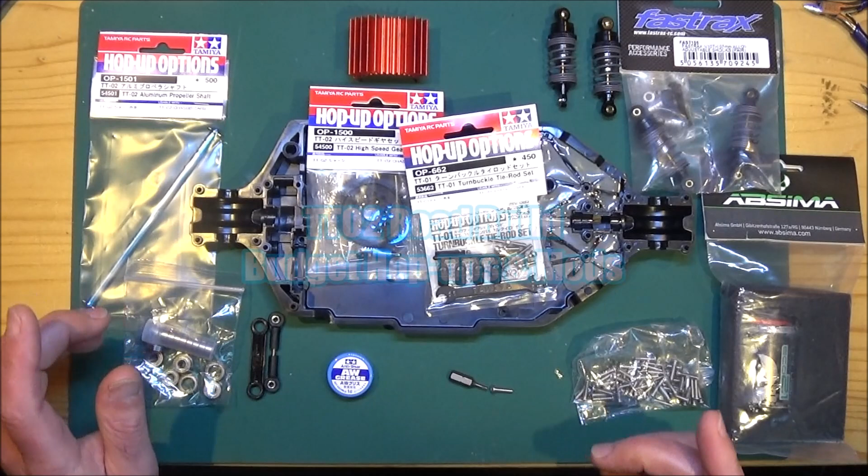Today I'm going to start building my TT02 chassis. This is for my wonderful Ford GT Mk2 body. This is how far I've got with that - the body all done. I've got a video coming up of how I did that, but before that I need to get the chassis completed. So obviously this is going to be running on the road, and I thought I'd share with you the little mods and changes I'm going to make to try and hopefully make it perform a little bit better than the stock setup.

So the main thing with these mods, apart from the shocks which are a little more expensive, is these are all really cheap, and some of them don't cost anything - I think all less than about 10 UK pounds. The shocks were over 20, but I think that's pretty much the price you're going to have to pay to get some kind of oil-filled shocks, but we'll talk about those later.

So these are the bits I've got. What I'll do is go through the build and focus on each of the little mods I'm doing, and explain what the mod is and what I think the benefits are. So if you're following along, you could mix and match, choose which of these mods might suit your build, and hopefully at least one will be of some use or interest to you. So let's crack on with it.

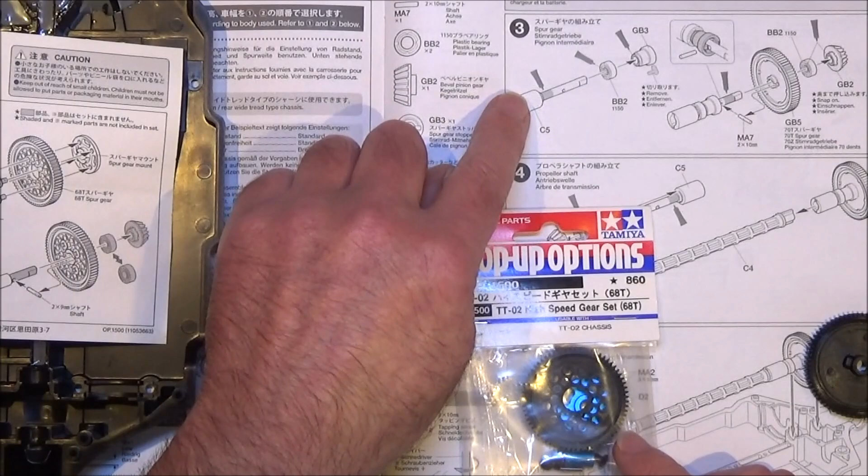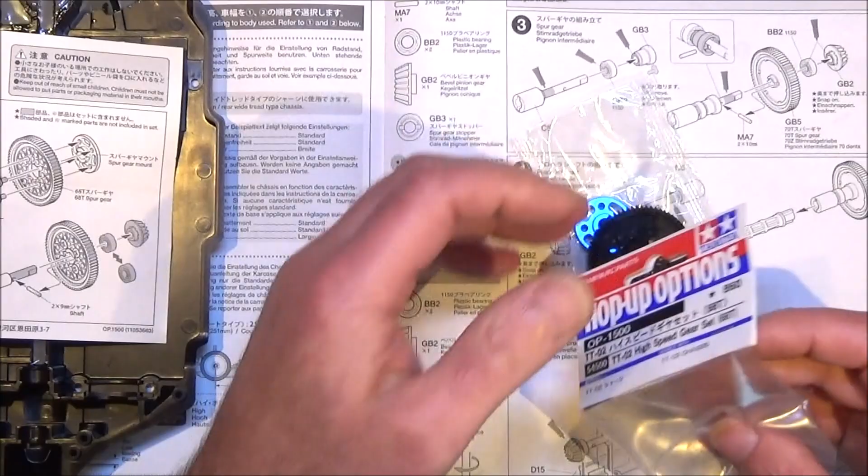Okay, so starting at step 3, the first mod I'm going to make is to swap out the spur gear. It shows here fitting the standard 70T spur. So I've got this hop up option, the high speed gear set with a 68T spur gear. The reason I'm going to use this is because it's going to give me higher gear ratios and a little bit more top speed. So that's going to go in as follows.

The first thing we need to do is fit this alloy carrier onto the spur with the 4 screws provided.

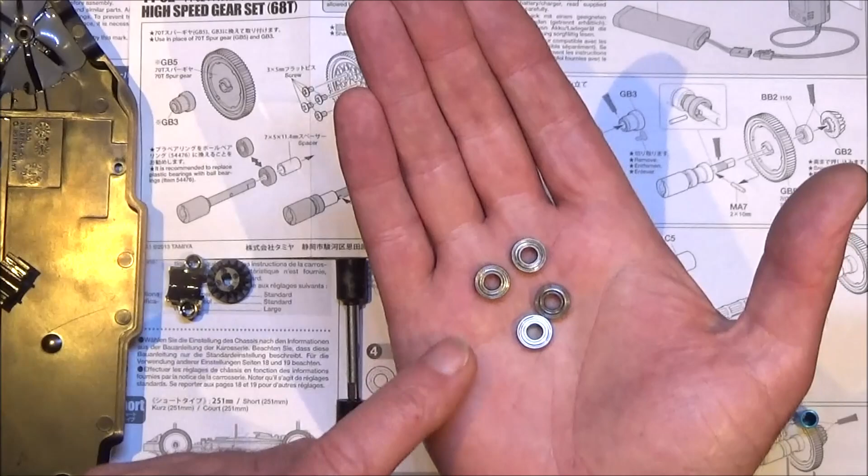Straight on to the next mod, which is recommended in the instructions for the high speed gear set, is to swap out the plastic bushings for a set of metal bearings. I do recommend you get the whole set for the kit so you can totally replace all of these. There are several reasons, the main one being you will never get as smooth a running with the bushings as you will with the bearings. They create more friction, they wear out pretty quickly, and the more they wear, the more vibration and resistance you're going to get. So you'll be smoother and faster with a set of metal bearings, plus they'll last a lot longer.

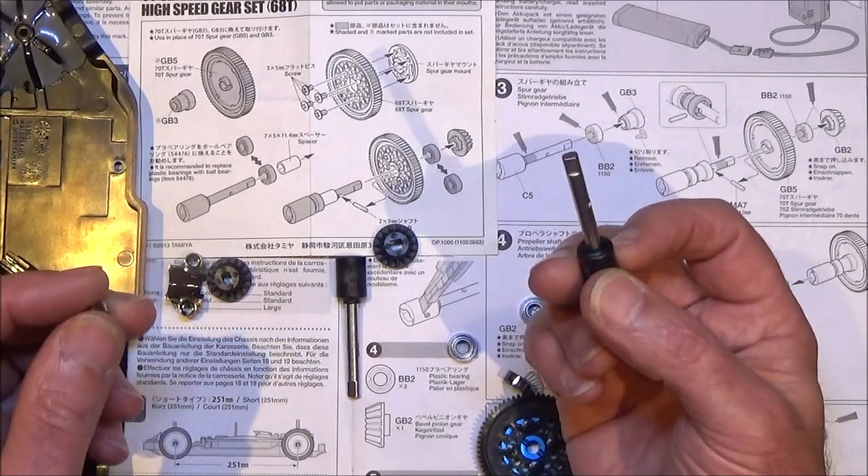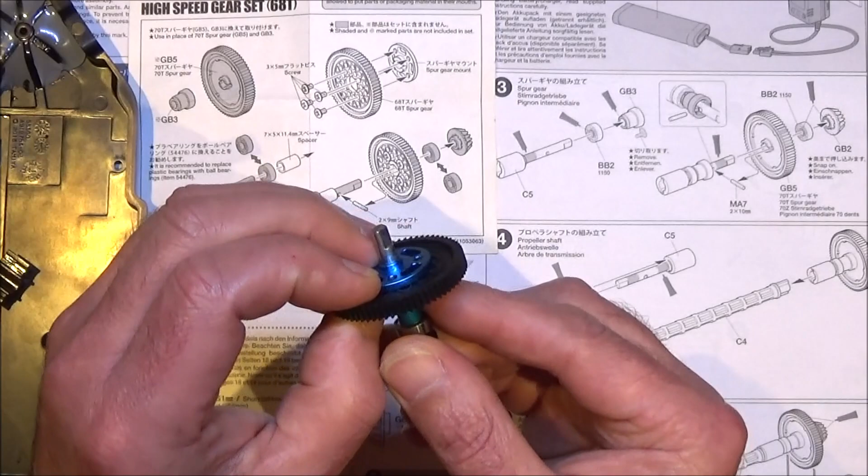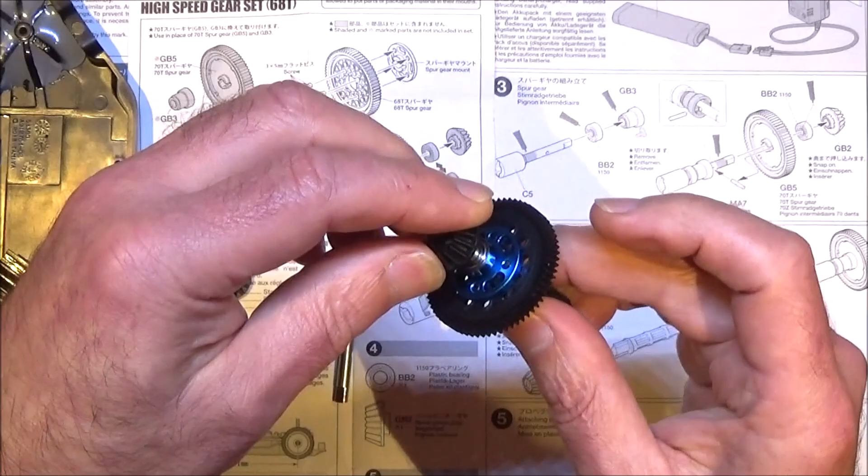So to fit the high speed gear, what we need to do is get your shaft here, which is C5, put on the first 1150 bearing, then your aluminium spacer. You've got your small pin or shaft which goes through that hole. Simply take your spur gear, and fit that shaft or pin into the groove in the carrier. Then your second 1150 bearing, and your GB2 bevel gear goes on the end. So that's the one end done.

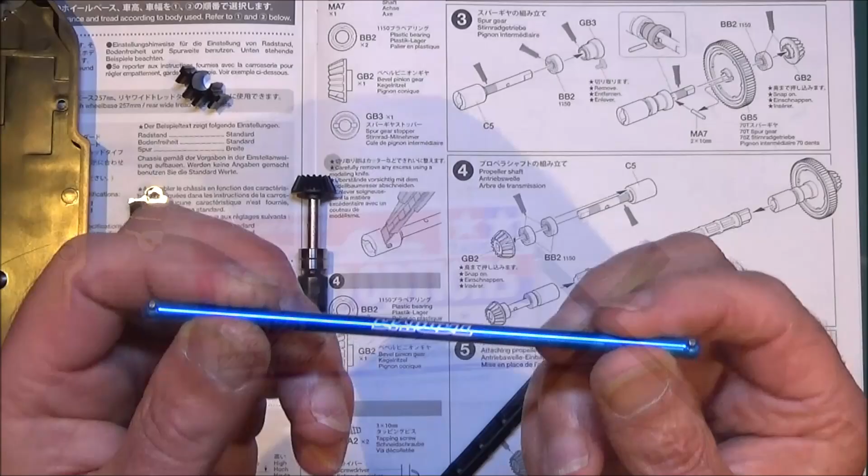Straight into step 4 of my next recommended mod, which is this hop up TT02 aluminium propeller shaft. You can see the numbers, and that's this little beauty here. This is going to replace the plastic prop shaft, and the reason for this is it's bigger, bulkier, has more rotating mass. It's flexible and will actually twist under load. So straight away replacing it with one of these will give you basically a smoother running TT02.

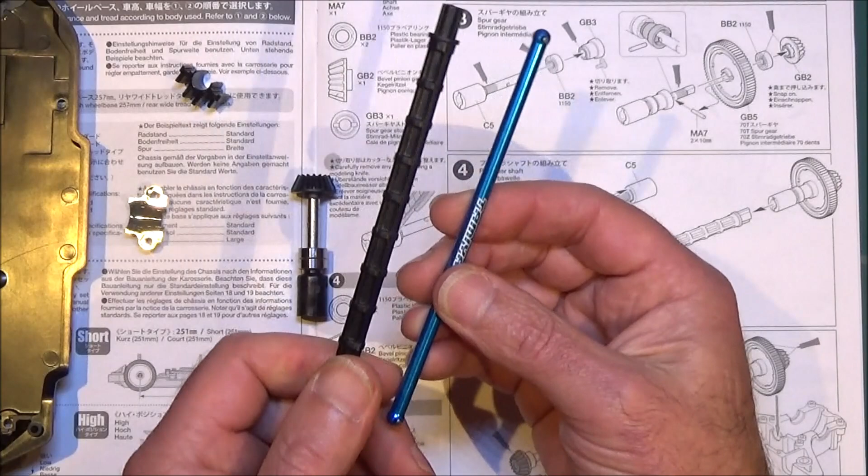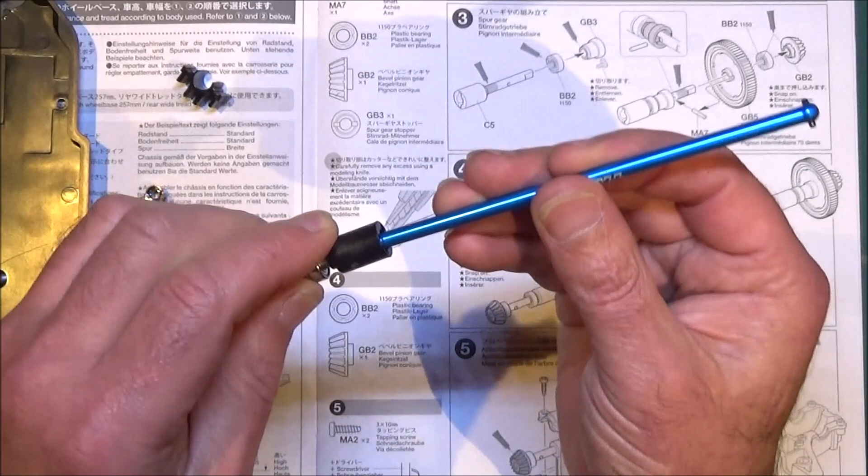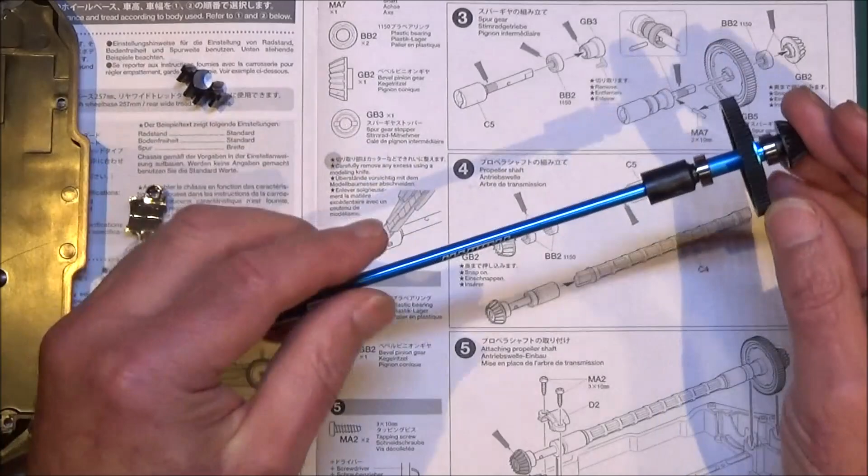You can replace these C5 parts with aluminium cups that go with this, but to save money, you can see that these do fit perfectly. I think you might get a little bit of an advantage with the aluminium ones, a bit tougher maybe, but these work okay in my experience. So yes, save a few quid - we're going to go with the original ones. So put your 1150 bearings on and your other bevel gear, and pop each end on like so, and straight to step 5, which is going to be putting it in the chassis.

Just drop it in place, make sure the bearings go into the bearing carriers in the chassis like so. It should spin round nice and freely.

Notice I didn't put in this part D15, and the reason for that is it doesn't really do much, except when it's in place, the parts that stick out either side restrict the movement of your steering mechanism and quite drastically reduce the amount of steering lock you get. So that's another little tip that costs you nothing: if you want a bit more steering, leave that part out.

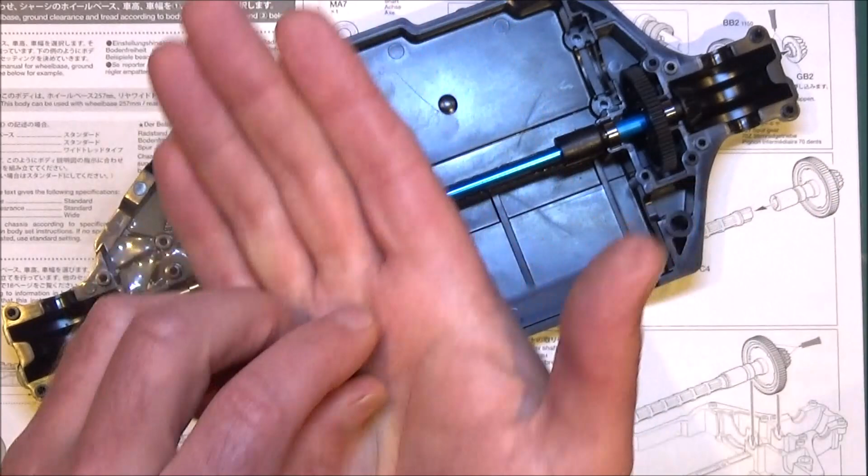I'm just going to clamp the front down with this part D2, which it says to fix into place with the self-tapping 10mm screws. Straight into one of my other little tips: replace those with stainless steel hex head cap screws.

Now these are machine screws, not self-tappers, but they work perfectly into the plastics. I've tried them many times before in other kits, no problems at all. The reason for using these is, again, dirt cheap - enough screws to finish the whole kit cost me about £1 or £2 last time. You use a hex wrench, and the mechanical fit into the head is much better than a crosshead screw, so when you're doing maintenance or rebuilds in future, you've got less chance of slipping with the driver. Also, they're stainless, so they won't rust, and stainless is a lot harder and tougher than the mild steel screws that come with the kit. Definitely worth putting those in because they're so cheap.

So we'll just get this fitted.

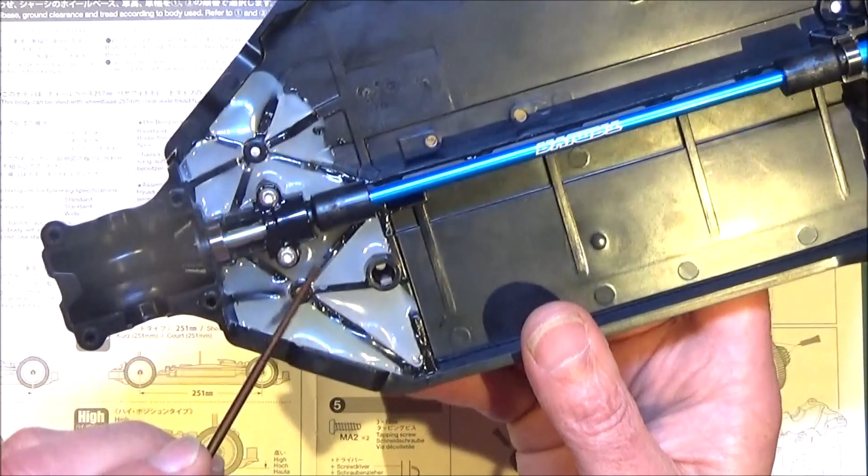Okay, that's done. And finally, another tip while we're at it - you might be thinking, what is that mess all around that webbing at the front? That's a bit of hot glue I've filled the gaps in this webbing with. The reason for this is many times I've had bits of dirt and debris, little sticks and so on flick up from the drive wheels and get caught down those gaps, jamming up the actual steering mechanism when that's in place, and this stops that from happening. You don't have to use hot glue - you can use putty, foam, anything that basically stops things getting caught around this area, which is where the steering mechanism will go eventually. So that's another little tip.

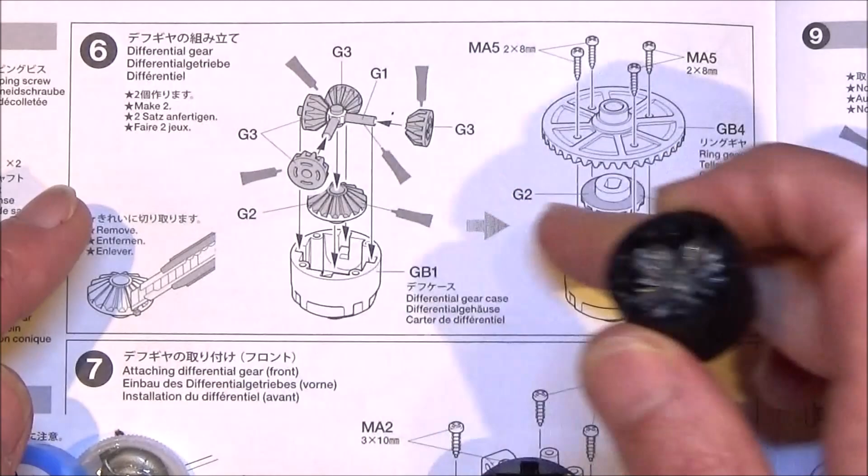Step 6 is making up the differential gears. There are two of them to do, and the only difference I've done here compared to the manual is using Tamiya AW grease instead of the grease provided - this will stiffen up the diff quite well. This stuff is really good, it's really sticky. If you can't get this, use any kind of really thick grease you can get. I always use a brush to apply it because it gets everywhere and doesn't come off - it's kind of like glue really. So just apply that sparingly.

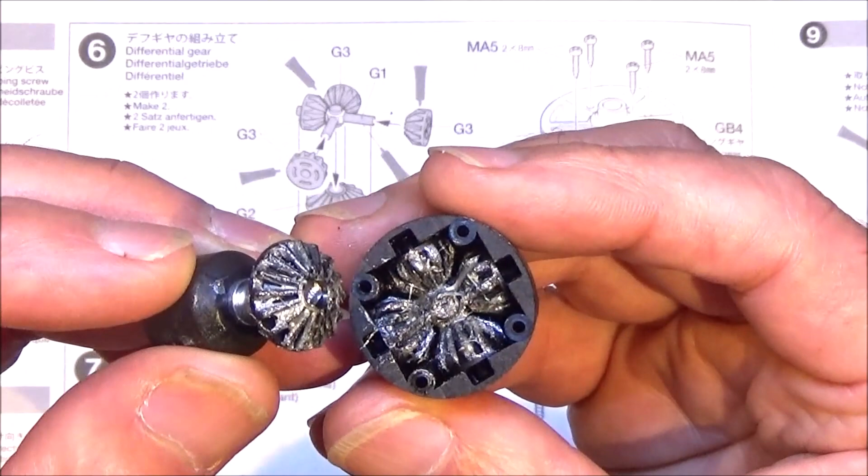Just finish off by putting the top bevel gear in. Again, I'm holding that with the output cup so I don't get grease all over my fingers. And when you turn it, you can really feel and hear how tight that is now compared to how it would normally be.

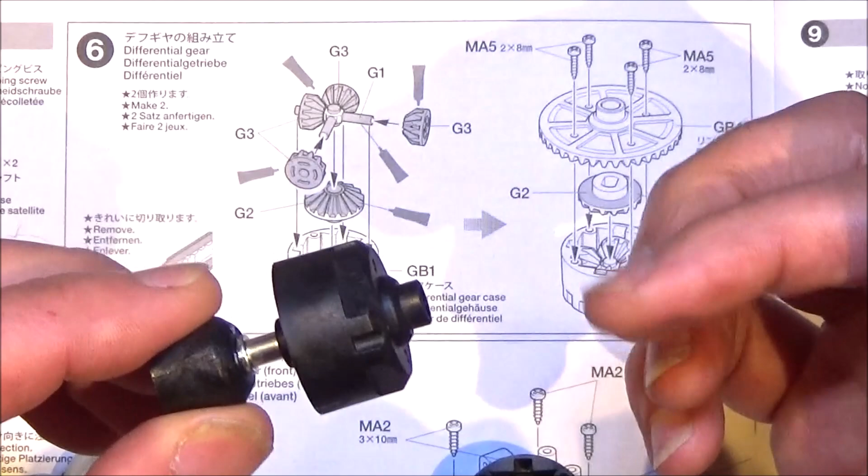So why are we doing this? The main function of a differential is to allow one wheel to turn faster than another. This is so that when we're going around a corner, the wheel on the outside needs to travel faster than the wheel on the inside, and that's what the differential allows. Now the downside is it also allows one wheel to spin freely - so if one wheel loses traction and starts to spin, all of the power will be sent from the differential to that one wheel that's spinning.

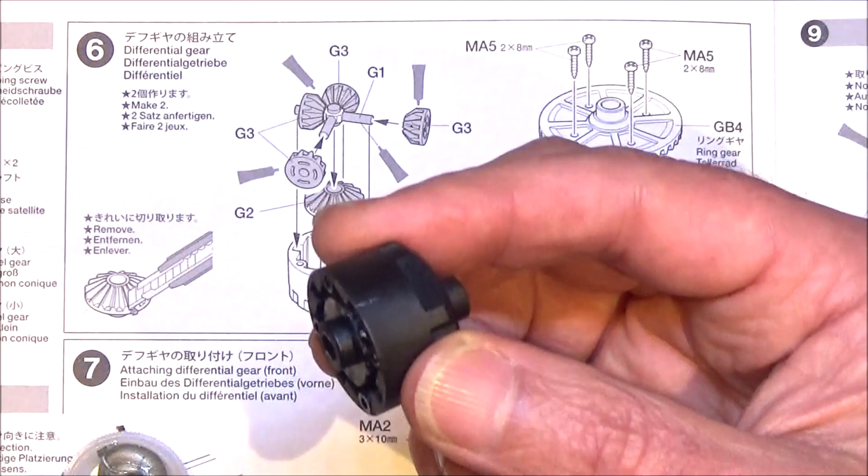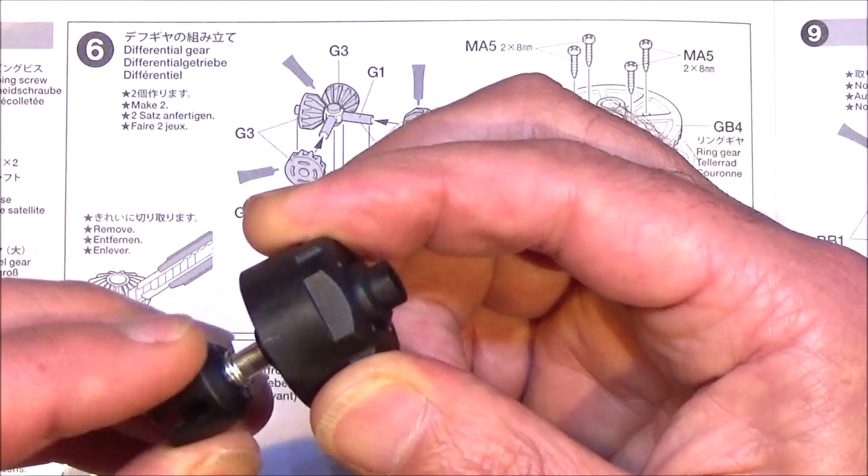Obviously this reduces traction, you're not getting traction to the other wheel that is touching the floor, which reduces speed and your car won't go as fast. So if we put this grease in, the AW grease, it tightens up and allows some of the power, when one wheel is spinning, to go to the other wheel. That's what we call a limited slip differential.

So that's both the diffs built up, and I've just popped them into place. I've put the bearings on, just drop the one in the front and the one in the rear. Make sure you get them the right way around. You can see this one points one way, the ring gear's there, and it's on the opposite side at the back. If you turn the shaft, you should get both diffs turning in the same direction.

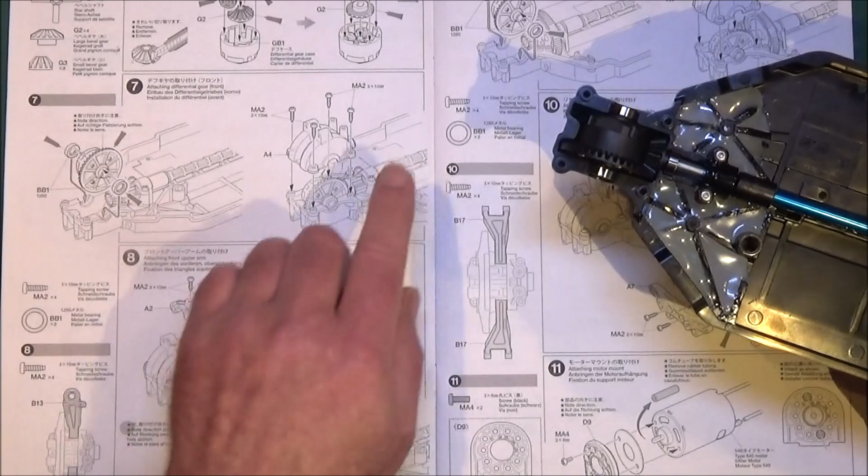Okay, so I'm just going to follow the rest of the manual through now, which is fitting the top arms, I think, and the damper stays, and I'll come back at step 11, which is going to be my next upgrade or mod, which is the motor.

On this build I'm trying to get the most performance for the least amount of money, so I've gone for this one because the Sport Tune motor is about £25 in the UK, and this one, would you believe, is £9, including postage. Another reason for going for this one is that it spins at a rated 25,000 RPM. Compare that to the Tamiya Sport Tuned, which I think is about 18,500. This thing spins a lot faster and therefore should give a lot more top speed. Well, that's the idea anyway, and it's a real good budget motor.

I've used them before, and I've also used them on the Tamiya TT-02 ESC. I know it's not rated for a 21 turn, but I haven't had any problems. Also, they've managed to pull the same gearing as the stock motor, so I'll be fitting the stock 22 tooth pinion on this one.

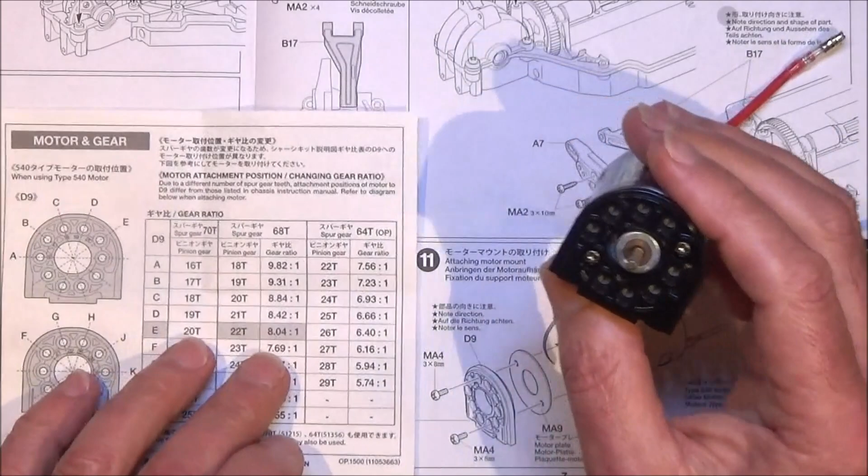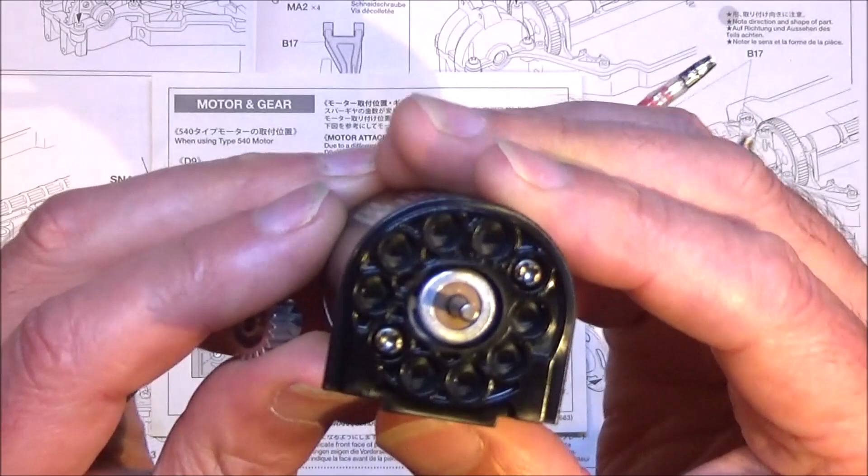Because I've got the high-speed gear set, we need to refer to this chart here, which shows that for the 22 tooth pinion I need to put it in the 20 tooth pinion position, which is position E, as you can see. So that's what I've done — attached it there to the 20 tooth markings. I'm just going to loosely fit the pinion and then set it in the right position once it's in the chassis, which I'm going to do next.

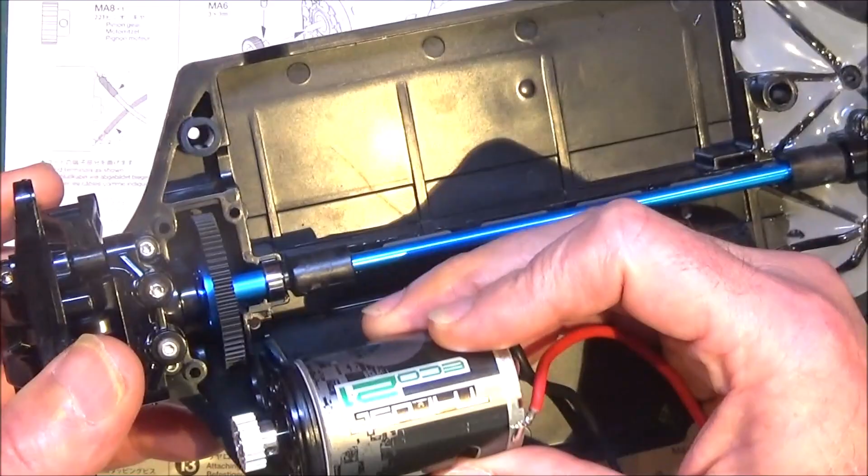Okay, so it just slots in there, and what you want to do is get that pinion right in the centre of the spur gear, as you can see, and then we can nip up that Allen screw.

So all I need to do is get the screws into this and then get the cover in place, and I'll get on with the next few steps off camera until we get to the next upgrade, which I'm going to do to the steering links.

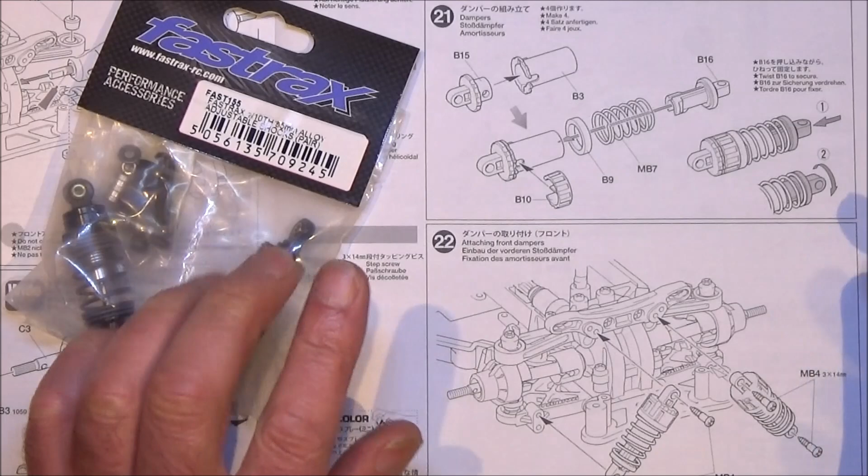Okay then, as the fitting of the dampers comes before the steering in the manual, I'll do that upgrade first. So yeah, obviously this is the standard shock. It calls it a damper, and as you know, dampers are supposed to slow the movement of the shock absorber due to the spring. As you can see with the standard one, I've just put this together to show you — look at the movement in that. It's a very sloppy fit, and there's no damping whatsoever. It's just, as I call it, a pogo stick. So those are going to make your TT02 bounce all over the place. The solution to that is to fit some oil shocks.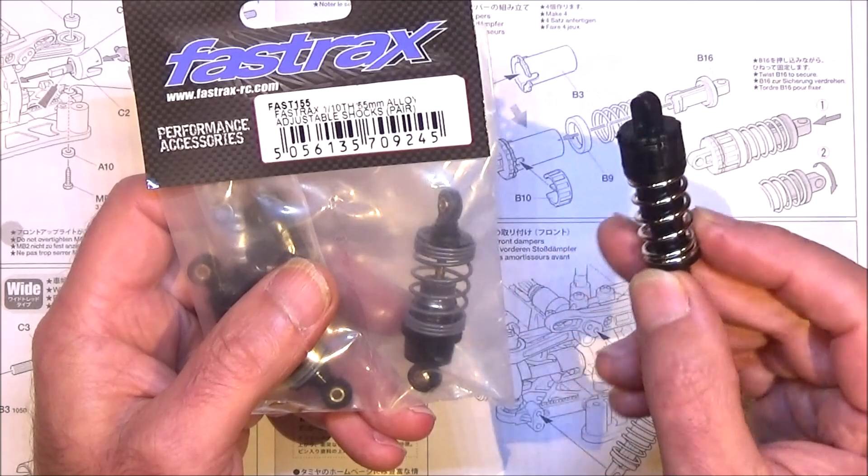Now I think that any oil shocks whatsoever are going to be better than these standard shock absorbers, as they're called. And I ordered these Fastrax ones. You can see the number there, and they seem to tick all the boxes. Just get them out the packet,

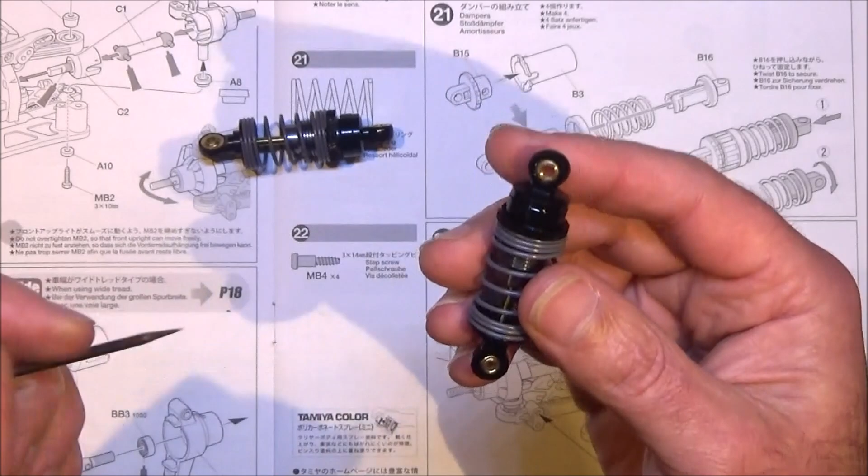and the shocks themselves are really well specified. As you can see, at each end we've got like a brass ball joint which allows the shock to move in all directions, which is good. It's got a knurled adjuster there, and we can adjust the preload kind of infinitely really just by turning that up and down, so that's cool. It's a full aluminium construction, and yeah, I like the fact that they're kind of dual rate springs as well.

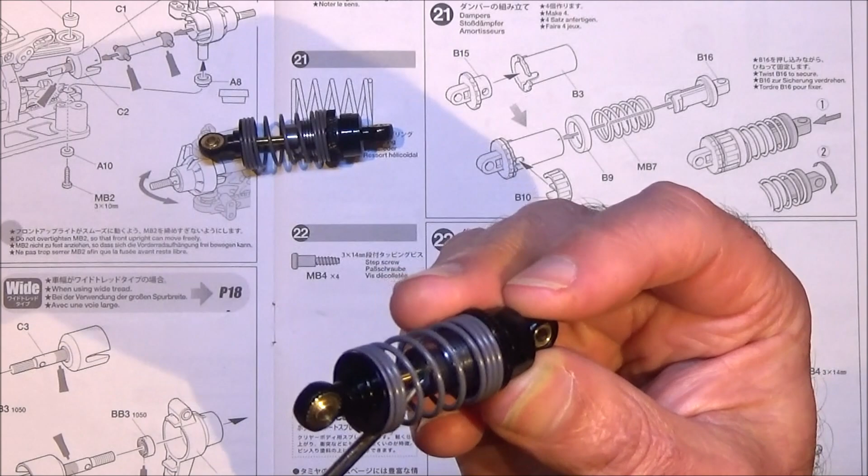These are about £13 for a pair, but to be honest with you, I can't recommend these exact shocks because I had a problem. You're probably not going to be able to see here, but there's a seal in there, and the seal isn't held in very well with the circlip that's provided, and it was kind of jamming on a couple of the shocks. So I've spent quite a long time making my own solution, which was a circlip out of much thicker wire, which I had to bend round and create myself. It took a bit of time, so yeah, that's a downside.

But any other oil-filled shocks like the Tamiya CVA Super Minis, 55mm long, are going to be better than the standard one. So definitely put these on. Benefits being the car's going to bounce around a lot less, you'll get more traction and more grip, which obviously equates to better handling.

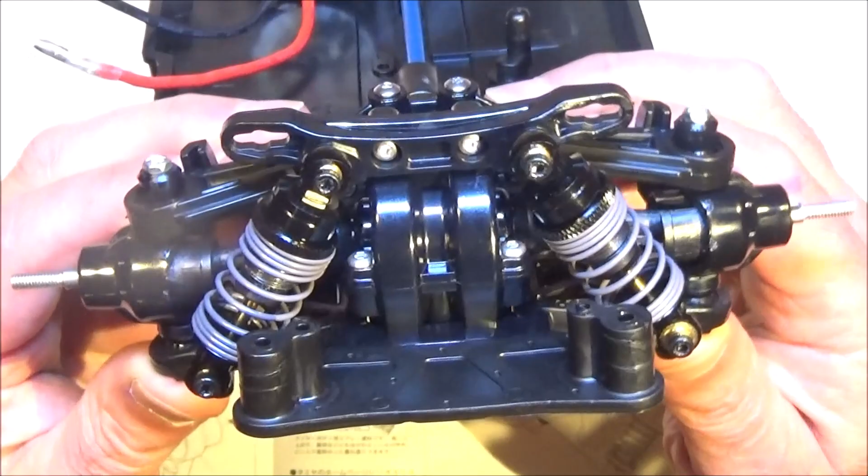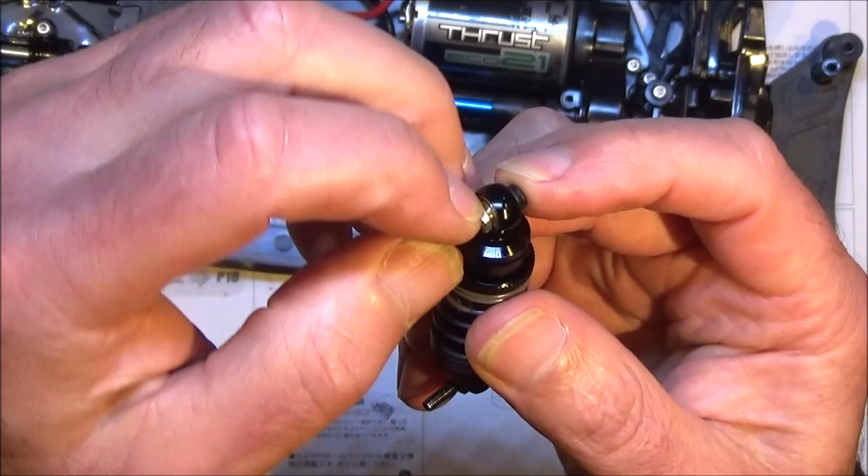So there you can see there's the front ones fitted, and they do feel nice and smooth, and I think these are going to work pretty well now that I've sorted them out. So to fit them, all that I did, as you can see here, is I've put an Allen bolt through, and then I put a nut on the back, and that's to stop the thin edge of that brass ball joint digging into the plastic, because if it digs in, obviously it's going to stop that movement.

So what we're going to do is I'm going to use the outside hole of the top mount there, and the top hole in the bottom on the wishbone or A-arm. So yeah, I'm just going to get those screwed on like that, and that'll be all the 4 shocks done.

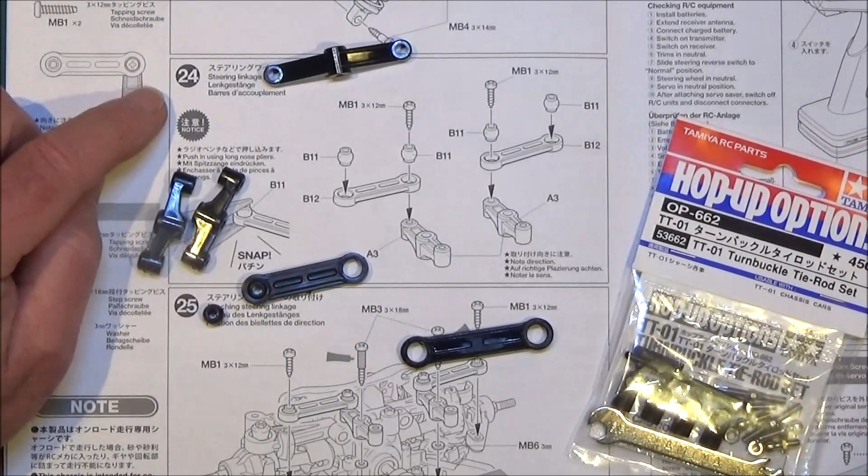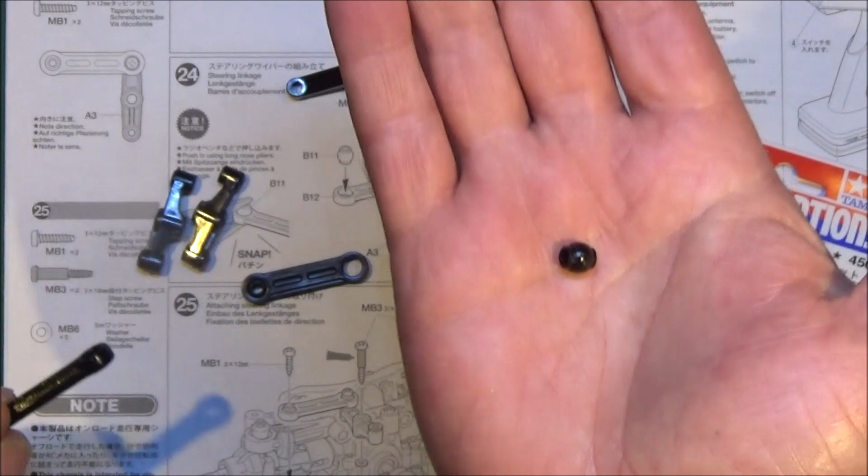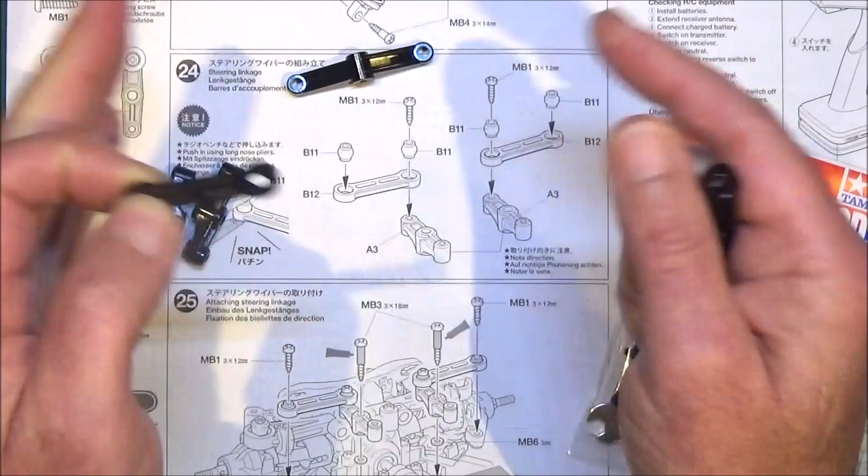So on step 24, which is the steering linkage, and this is my next mod. The standard setup basically consists of these plastic links and these little plastic ball joints, which are B11s. You have to force these into the holes, and I've got to say that in the past I've had a lot of problems with these binding. If you tighten up the screw slightly too tight, it'll expand the plastic, it'll start jamming and grabbing, your steering gets all notchy, and really there's no adjustment whatsoever. All these links are fixed and you can't adjust the steering at all.

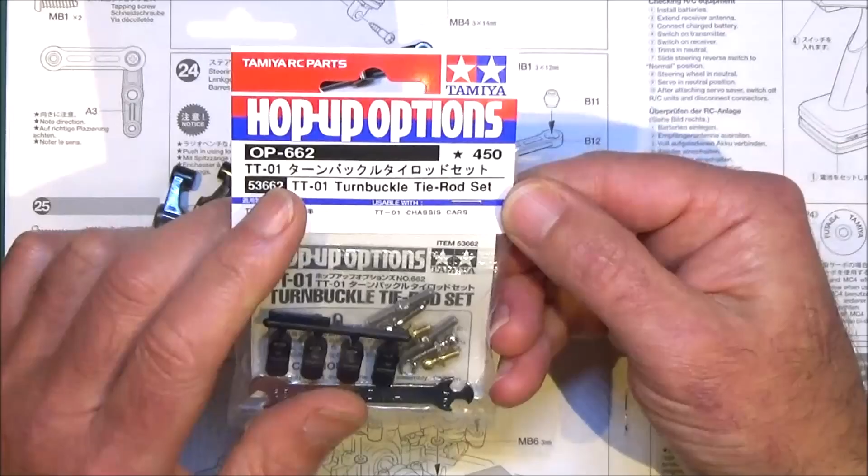So my next little tip is to go for the hop-up turnbuckle tie rod set. It does say for the TT01, but trust me, this will fit the TT02. So we'll just get this out. So in here, as you can see, you get metal ball joints to replace those horrible plastic balls, and you get the actual turnbuckle rod itself, which allows you to wind in and wind out the length of those tie rods. There's a tiny little instruction sheet just showing you how to put the ball ends onto those rods, and then how to fit it.

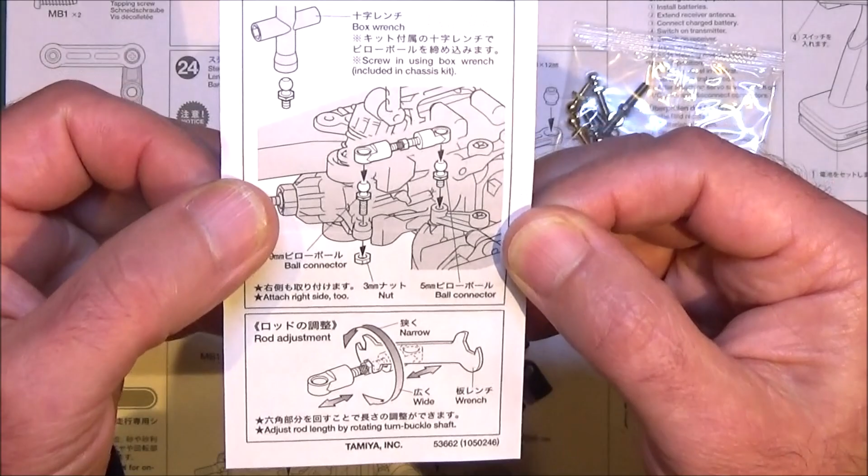So we'll just go through this now. I'll fit this onto the TT02. So as you can see there, here's your steering linkage. Got the brass ball joint on there, and then you've got the silver or the steel one onto the steering knuckle. And then what you need to do is just get that little turnbuckle and pop the ball joints over, and just get the other one done.

Okay, as you can see, now we can adjust the toe in or toe out of the wheels at the front there, and these ball joints, as I said, they operate a lot more smoothly and freely than those plastic balls. So yeah, that's a really nice hop up, I think.

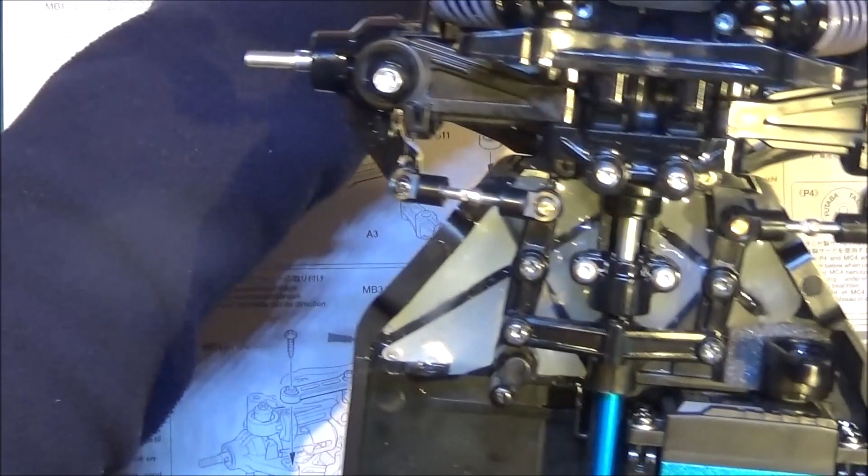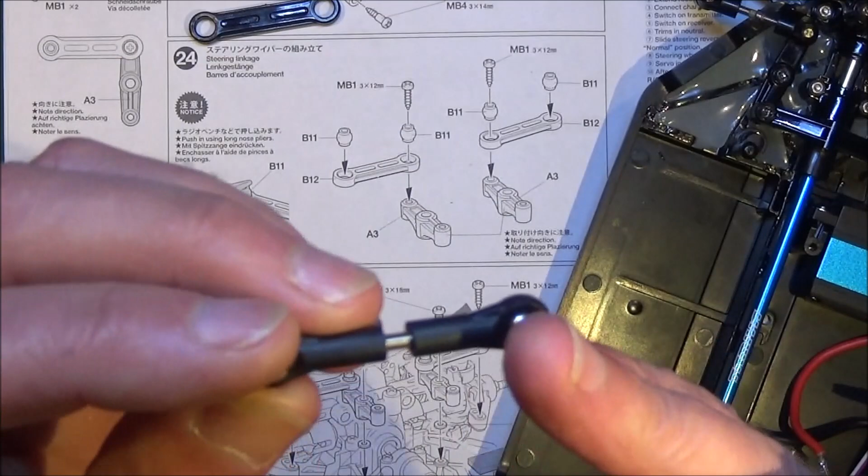And just to finish this off, I've made myself another adjustable arm, which is going to go across here onto the servo. It's going to replace the standard plastic one that also came with those plastic ball joints, and all I used for this was a pair of spare 5mm ball ends. You can use the shock bottoms like this if you want, and then you can get the steel threaded bar just by cutting the head off one of the Tamiya bolts, and that gives you the shaft that goes in between there. So that's another little tip.

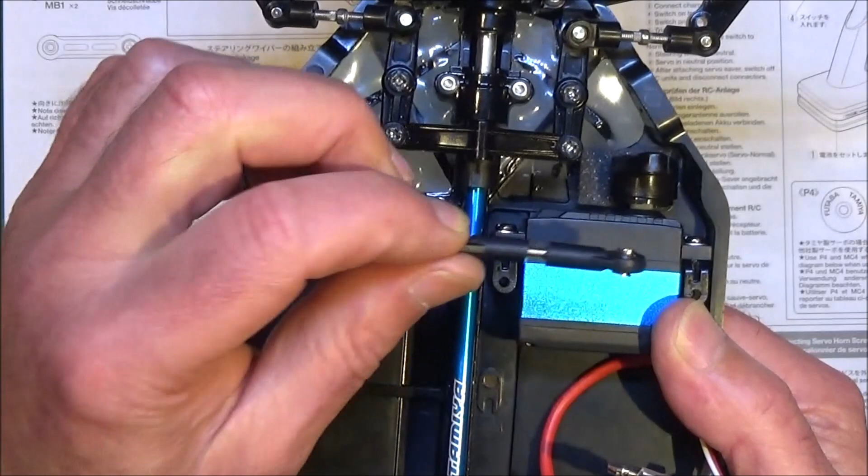So with this I can centre up the steering so it runs true without having to use the trim settings on the transmitter, which is always good if you're swapping transmitters from car to car. You put it in neutral, and obviously this should now, once it's set up, run straight without having to use that trim. So that's another good little tip.

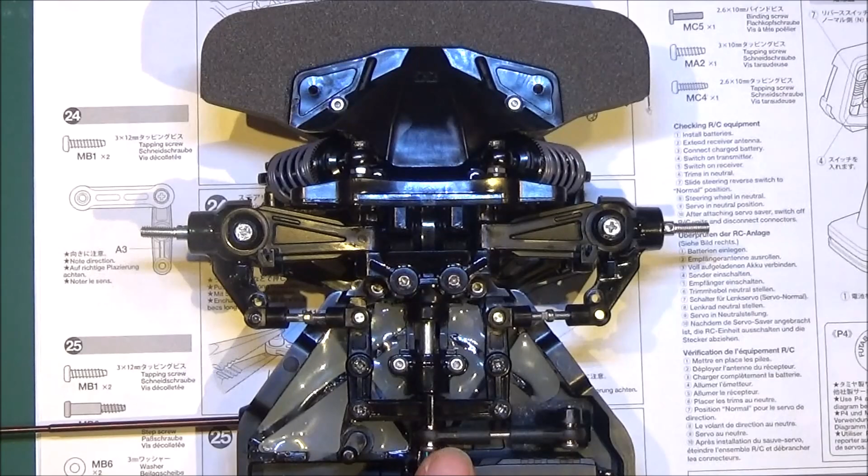So you can see I've got all the links connected up now. You can just about see the one on the servo there, and just fire it up quickly. Here you can see it's all moving nice and smoothly. It's much freer moving and smoother than the standard setup, and like I say, we can now adjust the toe in and toe out, and we can centre up the servo with this link.

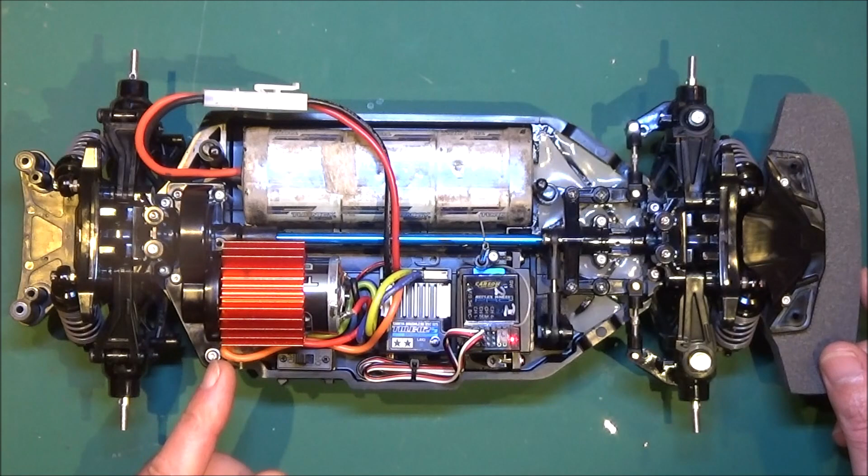So I've got all the electronics installed. We're nearly finished now. One of my last little tips is this is the cover that's supposed to go over the motor. Holds the switch, and it's got a little cover there. You could put a fan on that, which would be a good thing, but if not, leave it off, because it will just make the motor hotter.

And get a cheap aluminium heatsink like I've got here. I think this was £4, this thing, and that will keep your motor a lot cooler, and a cooler motor will last longer and run faster. So yeah, there's another little tip, and also it looks quite trick too, I think.

So we're all wired up. As I said, the steering is nice and smooth moving, just what we wanted. And if we just have a listen to the car run, it's nice and smooth running, so hopefully this should go well out on the road. So the last thing I've got to do now is get the wheels on, so the last little tip coming up.

So my last little tip, if you've stuck with me this long, is to put some foam in your tyres. Simple reason for this. This is a stock road wheel with a road tyre on it, obviously, a slick, and there's nothing inside this tyre. If I press on there, you can probably see it just goes straight down to the rim inside. So it doesn't take any pressure to push that in.

So obviously this part of the tyre is not going to be putting any pressure on the road surface, which means it won't have any grip. I think basically you'll be running on these sidewalls, which are the only thing that's got any kind of restriction when you press them in.

So if you look at one I've put some foam in, I'll press on it, but honestly it moves hardly at all now. Just a little bit, enough to give it a little bit of compliance. Obviously you don't want it solid, but yeah, it's much firmer all the way around, and hopefully you'll get more grip across the width of the tyre.

You can buy the Tamiya foam inserts. They're about £5 for a set. But I've got some kind of medium density foam here, so I've just cut out a piece, and all you need to do is feed it inside the tyre all the way around, squish it right in, and yeah, put it over the rim, and job's a good one. That's my last little tip for more grip.

So there she is. That's my modified TT02 chassis, all finished and ready for the road. Looking forward to getting the Ford GT Mk2 body on it and giving it a test. Hopefully you'll follow along, where we'll do some speed tests and some road runs. And like I said at the beginning, they're all cheap and easy to do mods. I hope you found at least one or two of them of some kind of use.